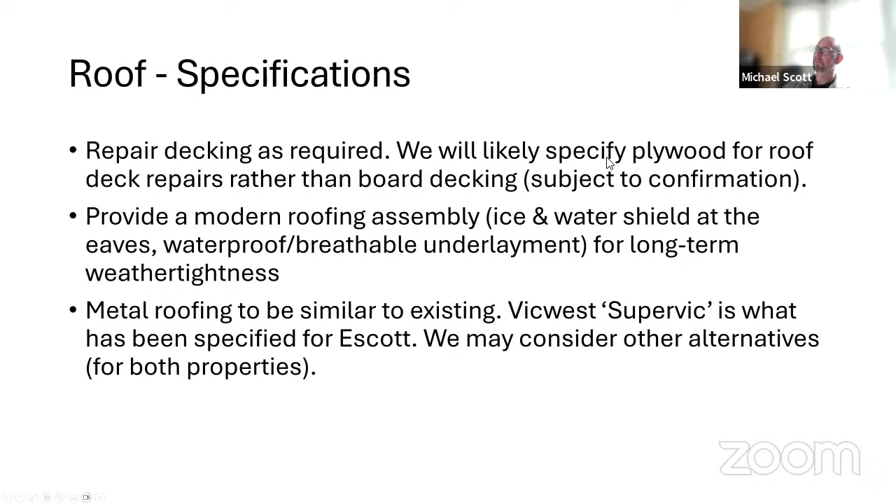It would probably be Vicwest roofing. Vicwest Supervic is what was previously specified for Escott Hall. We can go with that, or we might change for both buildings to Barnmaster, which is another Vicwest product that's very similar, as you can see, and maybe has a slightly subtler profile and resembles what's on the building now a bit more.

Otherwise, we would install modern roofing assemblies, so ice and water shield at the eaves and a waterproof breathable underlayment throughout, which should ensure long-term waterproofness of the assembly.

That's about it for the roofing. Oh, and then we would replace the gutters and downspouts. The main thing to note there is that the new downspouts will drain away from the building properly to reduce water infiltration to the bases of the walls.

Is there anything else in the short term that people would like to hear with regards to the roof? We do have a question. Yeah, Keith?

Hi, it's Keith Fly here. Through you, Mr. Chair. My question is, if when you strip the existing visible metal roof off, and I assume it's just strapped underneath, and then you discover that it's period metal shingles, what would be the process after that?

We would certainly document what's there and investigate thoroughly. Roofing is one of those difficult things because even if we discover that the roofing we've uncovered has significant heritage value, you can't really restore it and leave it.

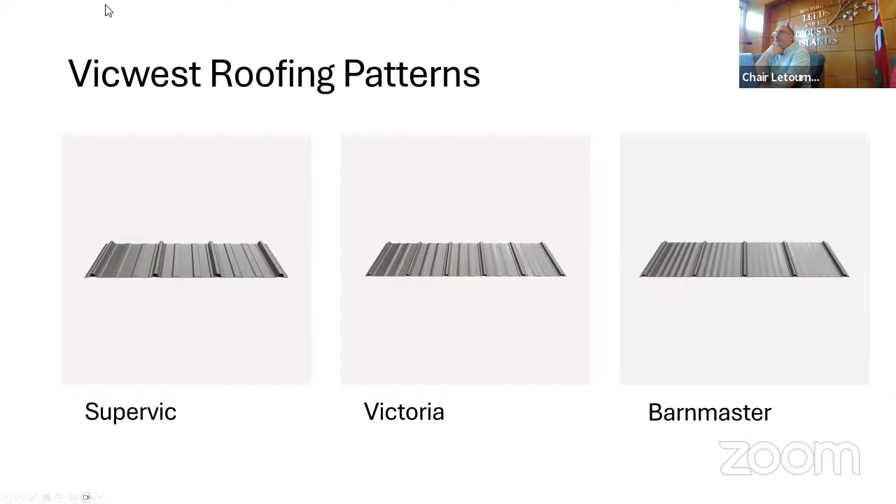And what will be the color? Truthfully, I'm not sure that we had got quite that far in our thoughts. David, I don't know if you'd had any thoughts on color. I haven't given it a ton of consideration yet, except that potentially the existing red actually looks pretty nice on the building, and matching it might not be the worst strategy.

Yeah, I agree, I think that matching the red would look nice. And we can certainly consider a secondary color as well too. Yeah, definitely, we can do that.

Yes, it's Councillor Grell here online. I was going to ask Michael - I had the thought as Mr. Sly was talking about the style of roof and the many layers.

Is it a reasonable thought to say, okay, we're going to replace the roofing, but can you save a section of it and kind of frame it up and say, hey, this is what was there? Is that ever done in this sort of application?

Thank you, I mean, certainly it is with materials of significant historic interest. You know, whether the existing top roof layer is necessarily that interesting is, you know, maybe a bit debatable.

It might make more sense with the underlayer, especially if it turns out to be something like a tin roof or metal shingles that have some interest. If it's simply a question of salvaging a piece of the existing red metal roof you can see in the image, we could certainly do that if there was interest in hanging it on the wall. But it probably doesn't itself have much in the way of heritage value, it's not that old. No, I was thinking of the underlayers that may present themselves, but thank you very much.

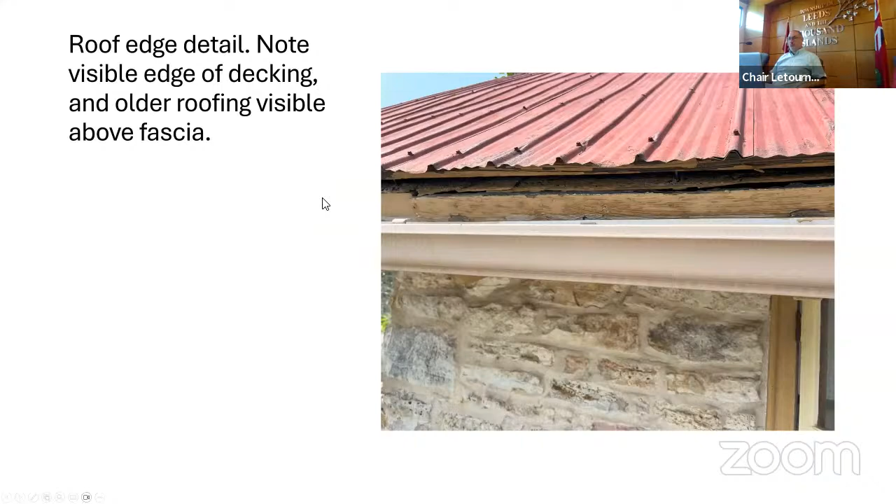James? Just another observation about the fascia: you made the statement that they were flat boards, and I'm not 100% certain, but I wondered whether there's another piece of molding on top that would need to be replaced as well. And I noticed at the eaves, or the bottom ends of what would be rafters, they're all on angles, and a lot of the eaves troughing is actually on little blocks. Obviously those were all additions later on, but would that look be maintained?

Essentially, yes. It's a difficult detail, because on the other side of the building they're wood, but this is the front, and they appear to be just bent pieces of gutter metal used to space it off, because the fascia is at an angle. We would certainly replace the existing angled fascia with a new angled fascia, though I'll probably use a slightly different detail to support the gutter. I think what we'll do is put in an angled fascia to match the original historic fascia, then add another piece of wood, slightly recessed and ripped at an angle along the length of the building, so the gutter is fully supported. Essentially, we'd replace the fascia with a new one matching the original exactly, and do whatever is needed outboard of that to support the gutters.

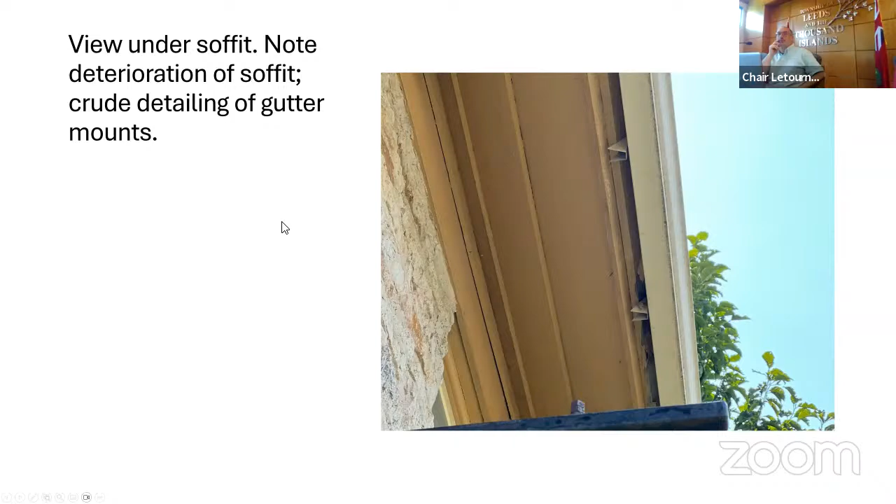If not, I understand there's a third part to the scope. Yeah, masonry. I should mention that the work on this project is divided between me and Tacoma Engineering, the heritage structural specialists, and the masonry is really part of their scope, not mine. They did a conditions assessment in 2021, but haven't yet gone back to do a detailed assessment prior to our putting documents together. So they may have additional comments beyond what I'll mention, but I can proceed with what we currently know and my thoughts on it.

So this is a typical end view of the building. As you can see, and if I zoom in, you can see in more detail, in general the masonry is in very good condition, at least as viewed from the exterior. A lot of the problems you see on historic buildings, such as deterioration of the mortar under the downspout, are not present here.

The building has obviously been repointed, and relatively recently. The structural engineers think there have probably been a number of different repointing campaigns on it, and certainly there are a bunch of different mortars visible. Some of them probably more appropriate than others, but whether the mortar used for repointing is the perfect choice or not, there are no signs of distress such as spalling stone faces that would suggest a problem related to poorly chosen masonry or mortar.

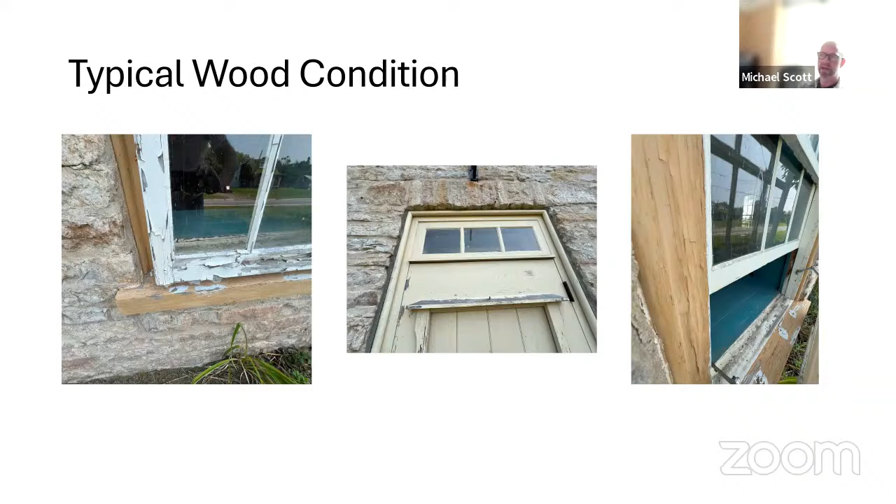There's possibly more in the basement. There are some areas of the basement foundation, by no means the whole thing, where there's significant mortar loss. This is a big crack as well running through, so there may be more work done on the interior faces. And similarly, if we're waterproofing the foundations, we will likely do, depending on condition, either partial or full repointing of the walls below grade prior to installing the waterproofing.

But that's about it. In terms of the specifications for the mortar work, we'll follow what's already been specified for Escott Hall, which is essentially lime mortar. King HLM 350 is what they're proposing for repointing, which is a good modern best practice for repointing historic buildings. And then the specifications go into great detail about the methods for cutting out and pointing.

You guys have probably already seen them for Escott Hall. I can certainly provide them for your review if you like.

I think the key points are that the masons doing the work have to be qualified heritage specialist masons, that we're requesting written description from them of all their procedures of work, followed by mock-ups of all the key areas, cutting out and pointing essentially in this building. And then proper protection of the pointing work after it's done by keeping it under wet burlap for the appropriate period of time, etc.

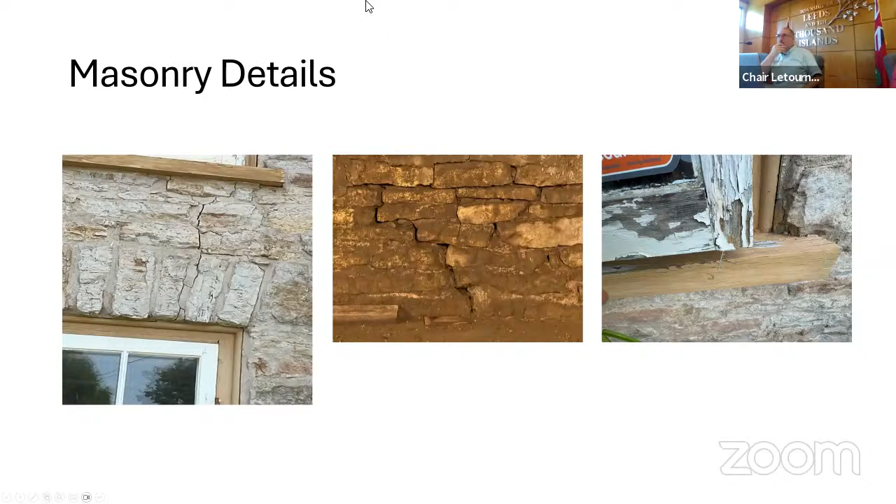I note that was part of the plan for 2024. Part of the work plan was for foundation repairs. So if it's something that can be added on, then certainly we should add it at this time. Yeah, the foundation and waterproofing should be added.

Okay, let's add it. Do you consider that a friendly amendment? Sure. Would we move the same? I guess my question is, the motion refers to the report done by Tacoma, and that particular part of the project is not described in that report, or is it?

I don't know that it was initially part of that, but it's something we have been working on at the same time. Then I think we should include it in the motion. The description of the work on the foundation and the perimeter drainage should be included in the motion.

So there's another part of that question as well, is there not, that would we improve the grading on the drainage right across the side road, to get the drainage from the basement level of Springfield House as a gravity drain across the side road? No, so the drainage from the foundation of the Springfield house will go into the sump pump pit, which will then be pumped up to the surface, and we're surface draining it down to the ditch at that point. We're able to achieve positive drainage from the building.